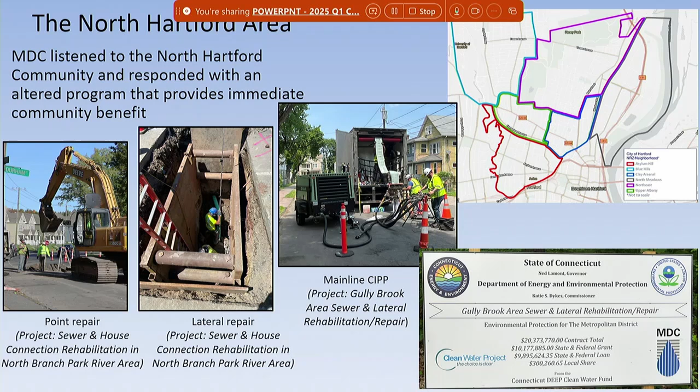On subsequent slides, I will go into more detail as to statuses and progress since the last update meeting. Photos on this slide are from 2024 and 2025, and again, there'll be more progress photos on future slides.

The Windsor Street Phase 1 project had not yet started construction as of the end of Q1. However, as a preview to our next meeting, it is now in construction in Q2 of 2025.

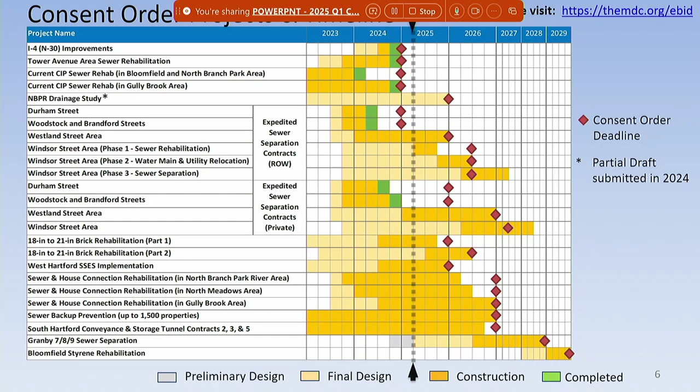So it did give us more substance for our Phase 2 of our program that's going to be starting up. Phase 1 is the sewer rehabilitation work, starting in Q2 of 2025, so you'll see a lot of activity on Main Street and Windsor Street over the next couple of months.

It's going to include laying a bypass pipe so that we can line the large sewer that goes down that corridor. Phase 2 is going to start in Q4 2025. That will include relocations of existing utilities, as well as eventually a water main project, which is relocation of a water main so we can get our new storm drain in.

Approximately a year later will be the start of the storm drain project, which is obviously the one that everyone's waiting for. That will begin at the end of Windsor Street on Sanford Street and continue all the way up to Main Street at Cleveland.

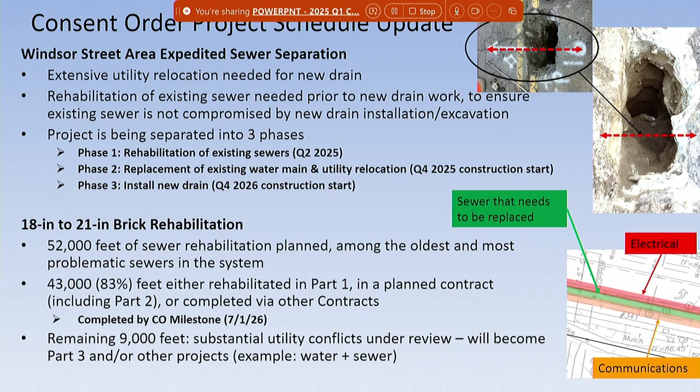Both of these projects, the Windsor Street and 18-inch brick, will require extensions to the milestones that are in the consent order right now. So over the course of the next couple months, as we finalize those schedules, we will be having that discussion with DEEP to modify those 2 milestones.

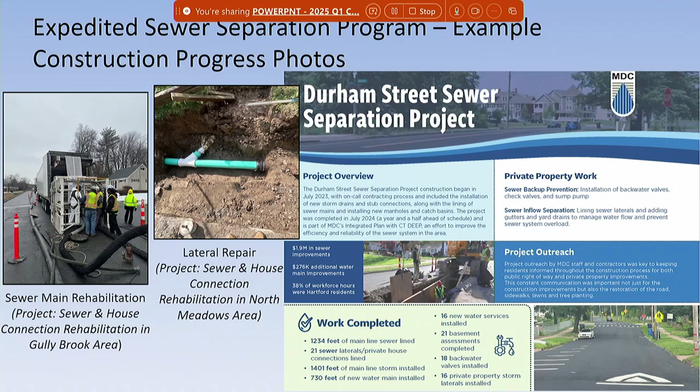This slide shows some photos from 24 and 25. Lower left-hand corner is sewer rehab work in the Gully Brook area. And then in the middle is a lateral point repair in the North Meadows area, with the purpose of this slide just being to give a visual as to what types of work we have going on as part of this program.

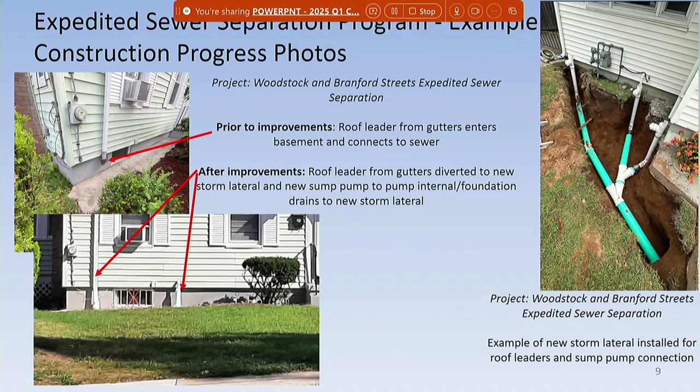This slide shows before and after, or more like a before and during, for a sewer separation on the Woodstock Branford project. On the left-hand side, you can see the existing roof leaders going into the concrete foundation. Below that, you have the after picture, where they are now separate and going into the ground with new white pipes. On the right-hand side is a picture of what a house like that looks like before the earth is put back over the pipes, with the 3 separate pipes coming out of the house and going to a new storm lateral outside on the street.

The sewer easement design project in Bloomfield is continuing on. We're still expecting that project to go to construction in 2026. Our easement clearing project is currently on pause as the contract ended in Q1 of 2025. We did advertise that project, and we're in the process of executing and awarding it. So when that project restarts, we will pick up where we left off in Newington with easement clearing and then move into Wethersfield next.

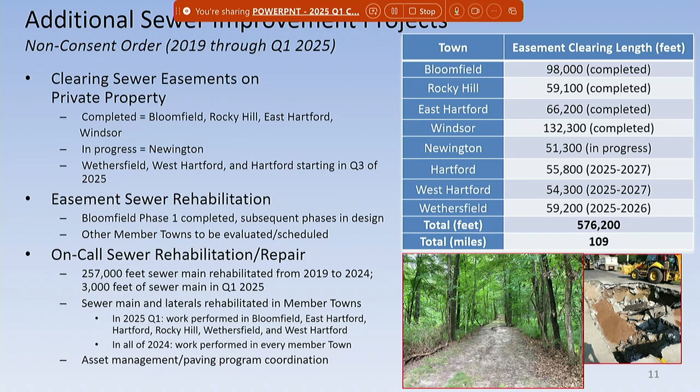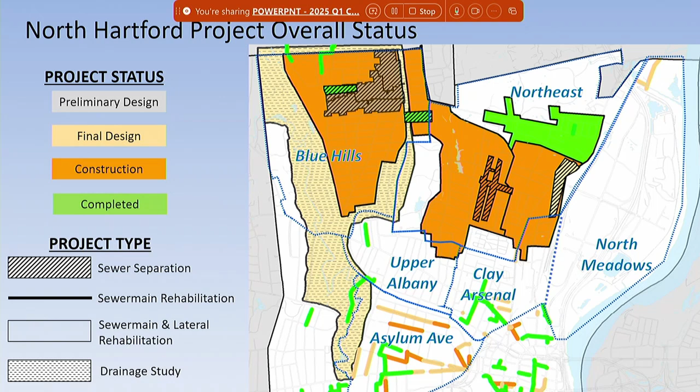This slide was added during our annual meeting. The purpose of this was to show all of the neighborhoods that we're touching in North Hartford, with active construction being that orange color almost everywhere, and the green being completed. There aren't any changes from Q4 of 2024, as no projects in the right-of-way changed phase in Q1, but it does show that we are continuing to be pretty active throughout all of North Hartford, pretty much touching the entire north end.

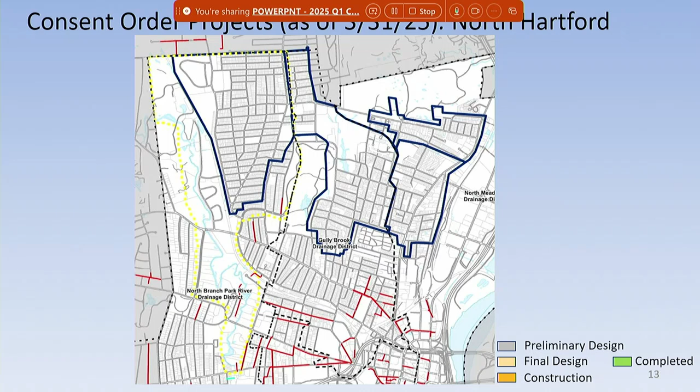Now, as I toggle through on this slide, I'll provide some updates as to what's been done. Oh, I might have over-clicked, sorry.

The first projects highlighted are the expedited sewer separation projects. They are Durham Street, which is complete, and so is Woodstock Branford. Those are both complete from public and private work. The Westland Garden project is in construction now, as I mentioned before.

Through Q1, the water main work on that project is complete. The sewer repair work on Love Lane is complete, and the sewer replacement work on the north side of Garden Street, north of Westland Street, has started. We also started the lateral lining work in Q1.

Now the Windsor Street project is shown next. I did mention on a prior slide that it has been split up into 3 phases, with phase 1 going into construction in Q2 of this year, and phase 2 going into construction in Q4 of this year.

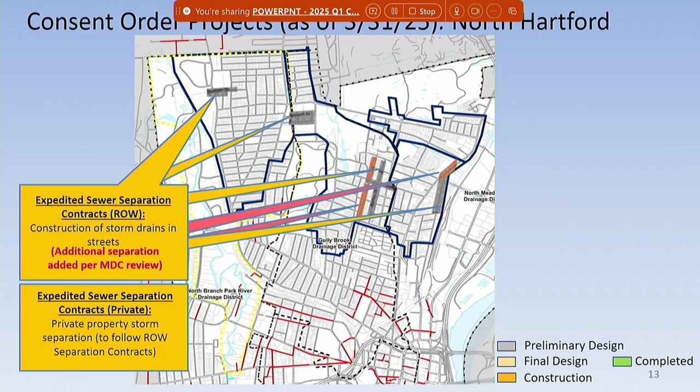The next project is the Tower Avenue area. That project was completed in 2024.

Now we've got the North Branch project area. That project is approximately 60% complete for the mainline lining, and about 28% of the laterals have been lined. So there's a lot of activity in the northwest corner there with that area. Again, that project will continue into 2026.

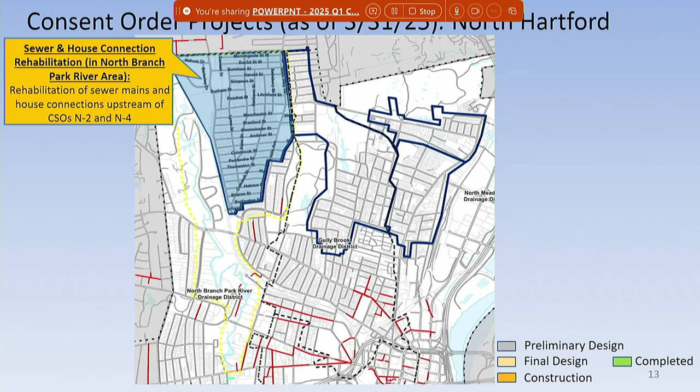And then the next project is the North Meadows area, which was the second project bid of those 3 large areas that I'm going through here.

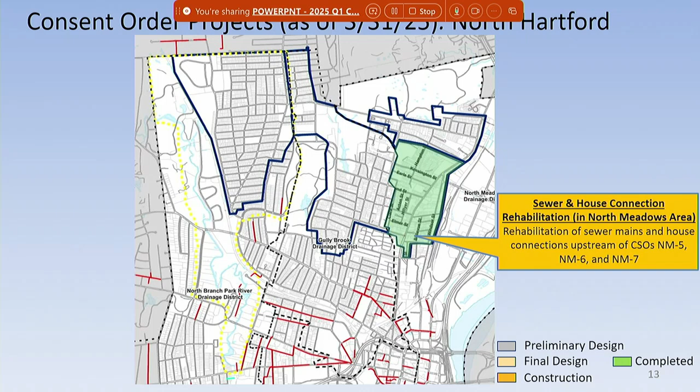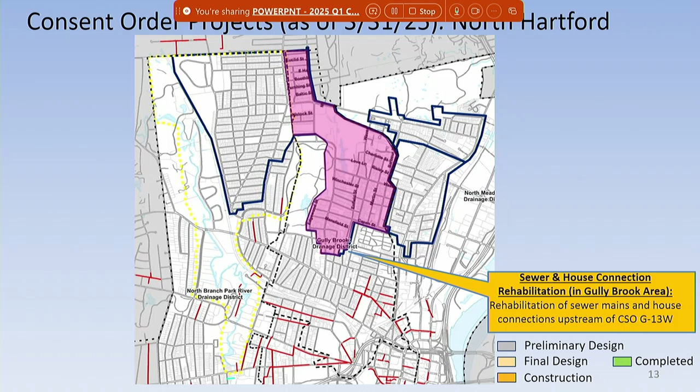That project is about 15% complete for mainline lining, and approximately 80% of the laterals have been TV inspected. This is through Q1, so these numbers are through the end of March. The third project is the Gully Brook area, where we've lined about 10% of the mainline sewers, the pipes in the street, and TV inspected about 6% of the laterals. That was the last project advertised, so those numbers are a bit lower than the other two projects.

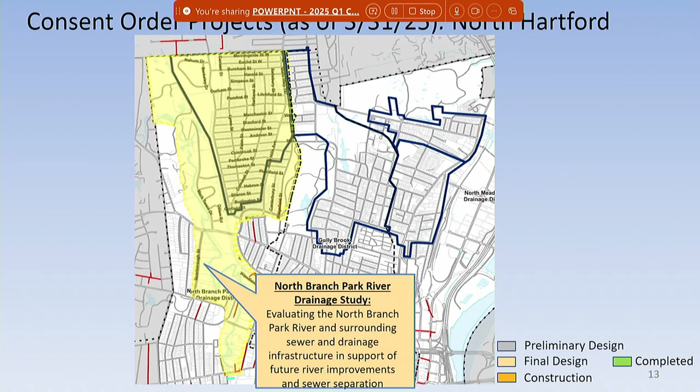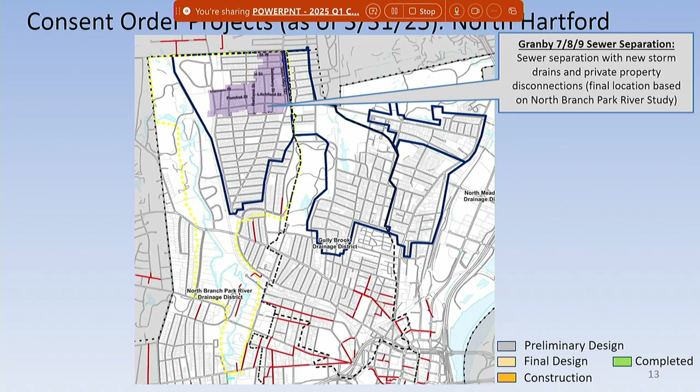This yellow area, again, is the North Branch Park River drainage study area. I have another slide dedicated purely to that, and I'll talk about it when we get there. The purple is the Granby 7, 8, 9 area, which will also be discussed on the North Branch Park River drainage slide.

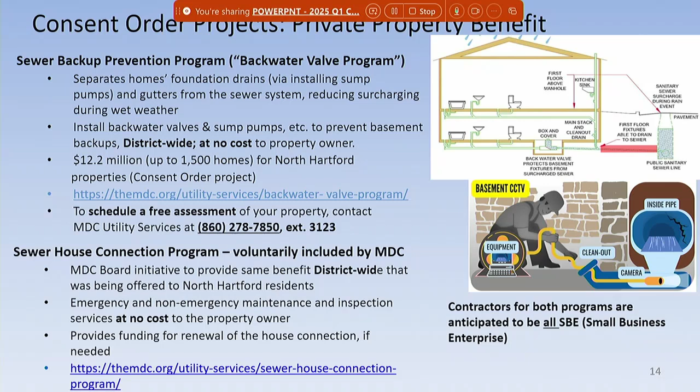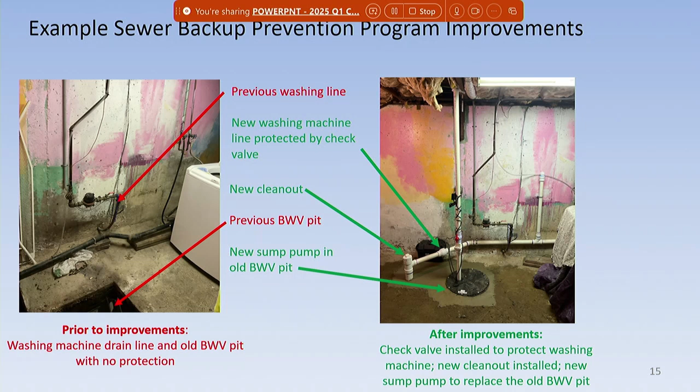This slide shows a house that was part of the sewer backup prevention program. Every house is different and unique, really an individual project for our utility services staff to figure out and solve. This is the before and after of one property: on the left, an empty, open-to-the-air backwater valve pit that likely surcharged; on the right, that was replaced by a new sump pump in a backwater in that pit, which disconnected the groundwater sources from the house and prevented it from being susceptible to backups.

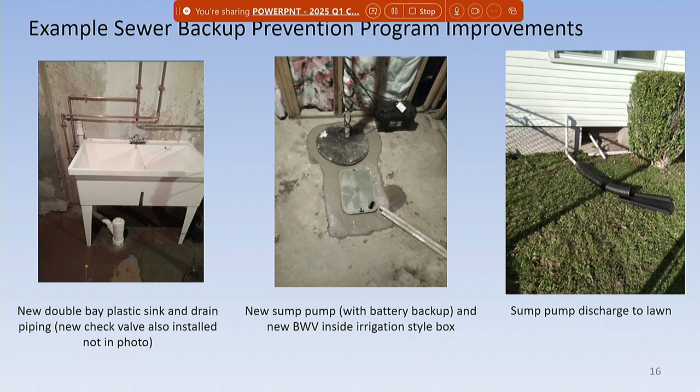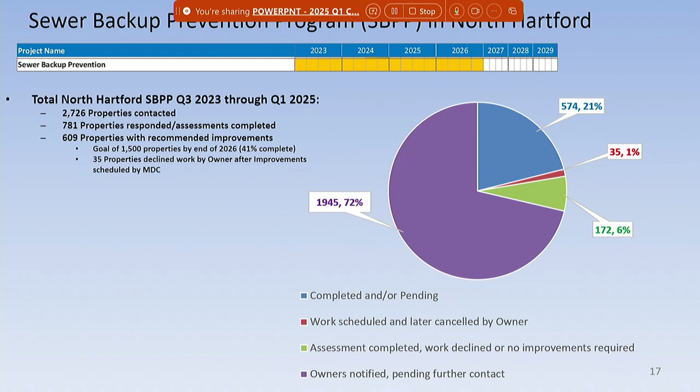It's worth noting we're plugging along towards that goal of 1,500 properties with recommended improvements. That number is now sitting at 609 - that's 41% complete. Through Q1 of this year, we're 41% complete on time, so we're actually right on target if you compare time elapsed to the number of properties we've worked on.

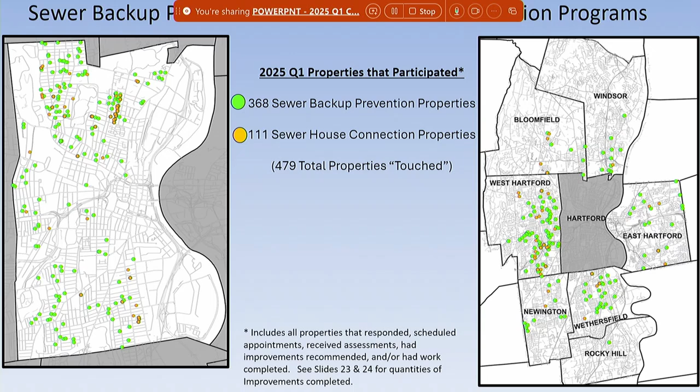This shows the properties that participated in either the backup prevention program or the house connection program - that could be a simple property visit, an inspection, improvements recommended, or even improvements completed. So this is really the properties we touched as part of these two programs. The number 479 is right on par with what we did in quarter 4 of 2024, so that number did not change substantially. But going back to the last slide, we are pretty much on target overall.

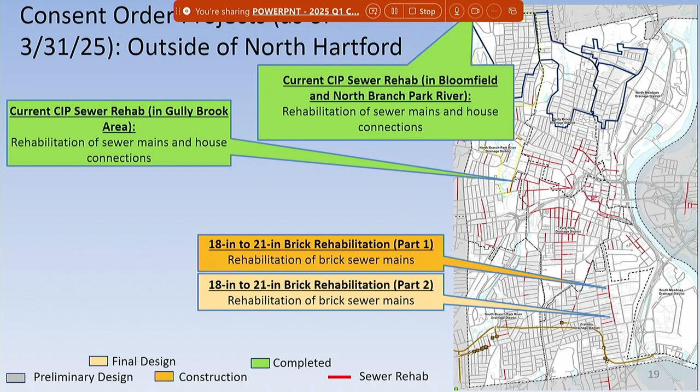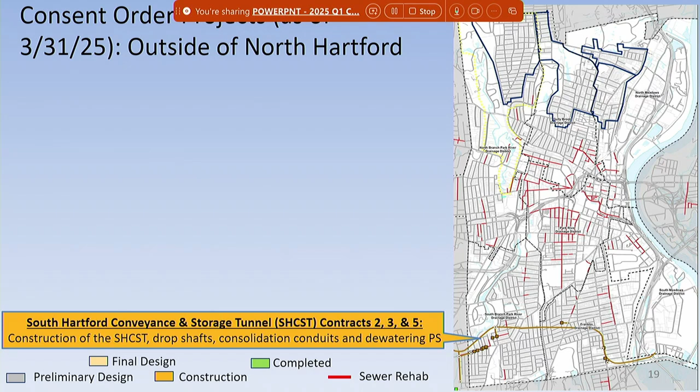The last project shown on the slide is the tunnel project, which is still underway with the expectation to come online in late 2026. And the last one is the N30 project, a small CSO project that was completed in 2024.

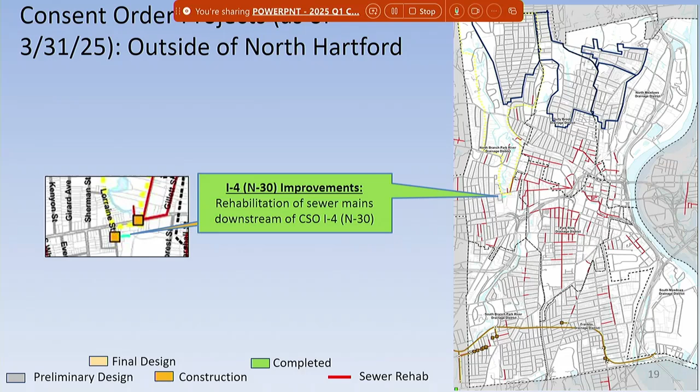Now moving ahead to projects, consent order projects outside of Hartford. Obviously, the Bloomfield Styrene project is still a couple years out, so that has not started.

The sewer rehab project in Bloomfield and North Branch Park River area was completed in 2024. The West Hartford SSES project is a very large lining project with approximately 105,000 feet of sewer rehab and about 2,000 properties having sewer laterals lined.

Through the end of quarter 1, we had TV inspected and cleaned, which is the prep step for lining work, approximately 100% of all the mainline sewers, and we had done the same thing for about 55% of the laterals. So we're still on par and on target to complete the mainline lining work for the sewers in the street by the end of 2025, as that is the consent order requirement.

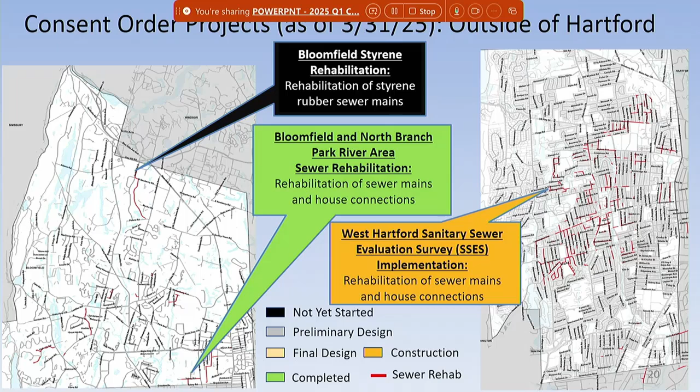Moving ahead to the North Branch Park River drainage study. In quarter 1, the key highlights were that CDM Smith, the design consultant hired by the city and the district, completed its report for the river recommendations that was submitted to the city. Additionally, they submitted a draft preliminary design for the sewer separation work to both us and the city for review, and that report is currently under review.

Also in quarter 1, we've started working on an MOU between the city and the district, which will lay out the expectations, schedules, and groundwork for implementation of what comes out of those two reports. Obviously the two impact each other, so we're working on that. The goal would be once that MOU is signed and executed, then Granby 789 design would start up.

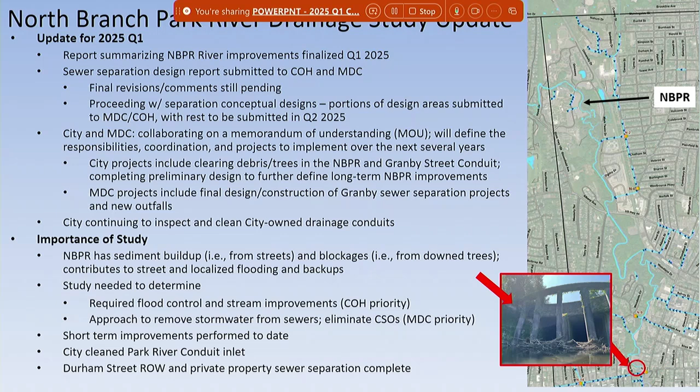The outline of that will then be used for sewer separation evaluation that we need to do as part of our next long-term control plan update. The drainage study field work has started, or will be starting in quarter 2 of this year. So you may see some crews in and about looking in manholes or looking in some of the drainage culverts around the city. The study itself will be done by the end of 2027.

The findings from that will then be incorporated into the long-term control plan update, which I mentioned. The long-term control plan update is due by the end of 2028.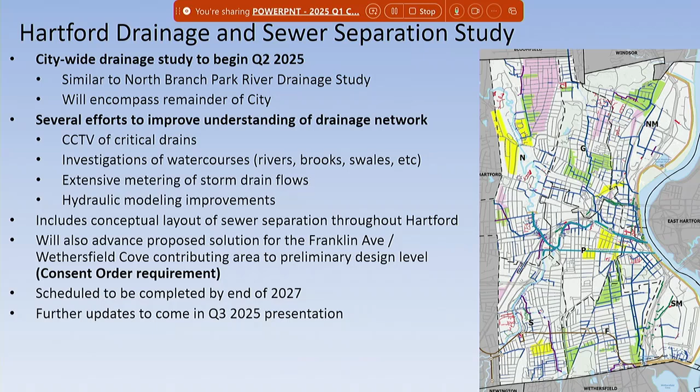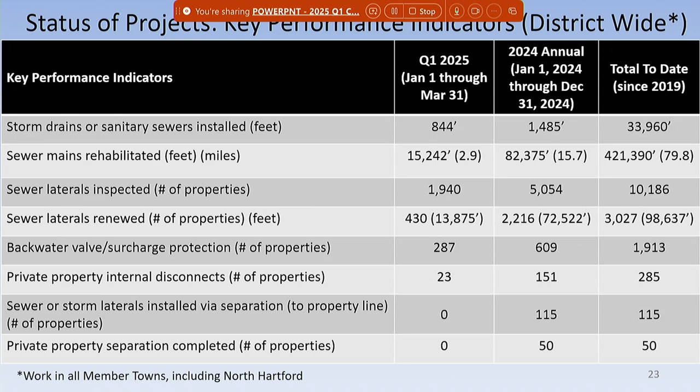However, when we go to the next slide, which is North Hartford, that's where you'll see some more changes. Pretty much every single KPI on this slide did increase compared to quarter 4 of 2024. And while the weather was not very good for construction, because we had so much more activity going on in North Hartford, that's why those indicators increased.

Of note, the footage for mainline rehab and the number of properties where we did lateral inspections, both of those numbers have doubled compared to quarter 4 2024. And then if you project out the rest of this year with 3 active contracts, plus not dealing with freezing temperatures, you're going to see those numbers continue to increase.

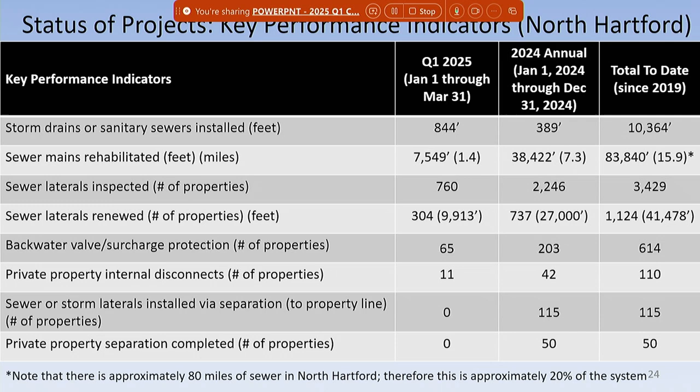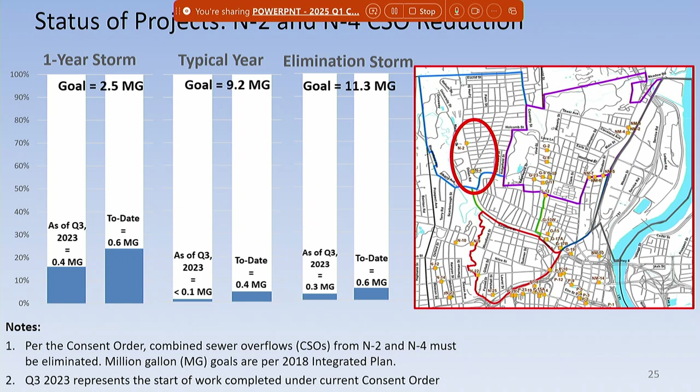As I mentioned on the prior slide, the one that had the green highlighted projects with the CSO reductions by project, there weren't any projects that were completed in quarter 1 of 2025. So as a result, this slide did not change. We do only update this slide when a project is considered substantially complete.

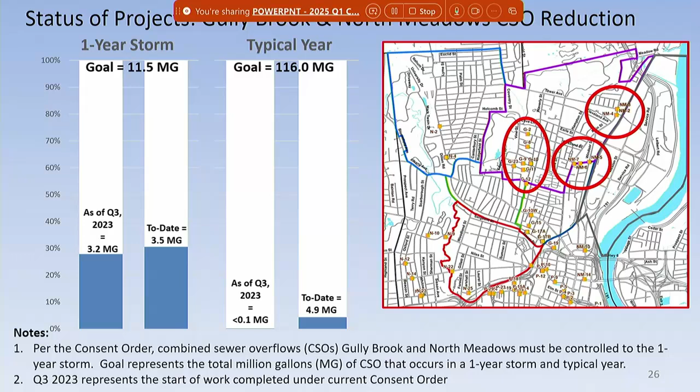In similar fashion here, we've got the CSO reductions in the northeast corner of the city. Again, no projects were considered complete in 2025, so this slide did not get updated.